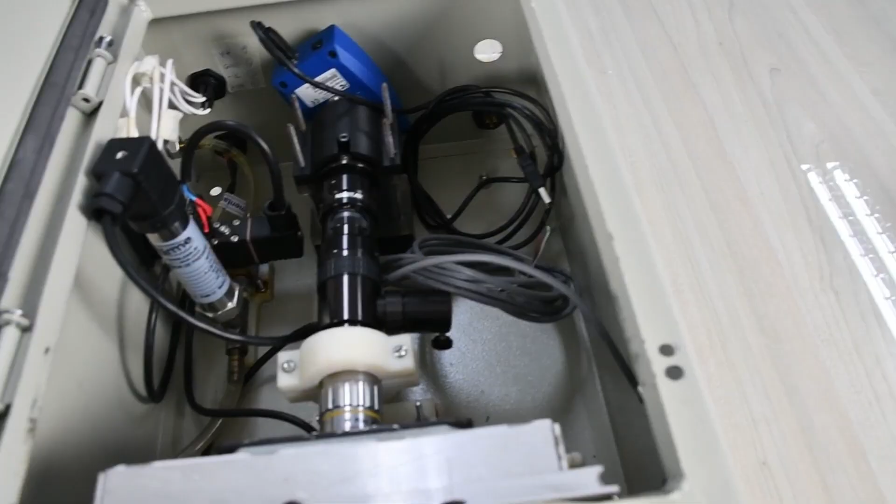Então eu vou mostrar para vocês agora o interior, para vocês terem uma ideia de como é que funciona este dispositivo. Continuidade então ao primeiro dispositivo. Aqui então tem o nosso microscópio industrial. Abrindo aqui, nós temos um sistema de câmera com uma lente microscópica, um microscópio industrial aberto. Então já dá para ver inicialmente aqui o sistema de montagem, de fixação da câmera. Ele foi desenvolvido utilizando a impressora F170, que é um suporte em ABS.

Aqui nós temos um outro suporte já em resina, que foi fabricado anteriormente, porque essa lente fica em balanço. Se eu não tivesse esse suporte, ela ficaria em balanço e eu teria dificuldade de fazer um alinhamento desta lente, porque ela pode também transladar, se mover aqui para frente, para trás.

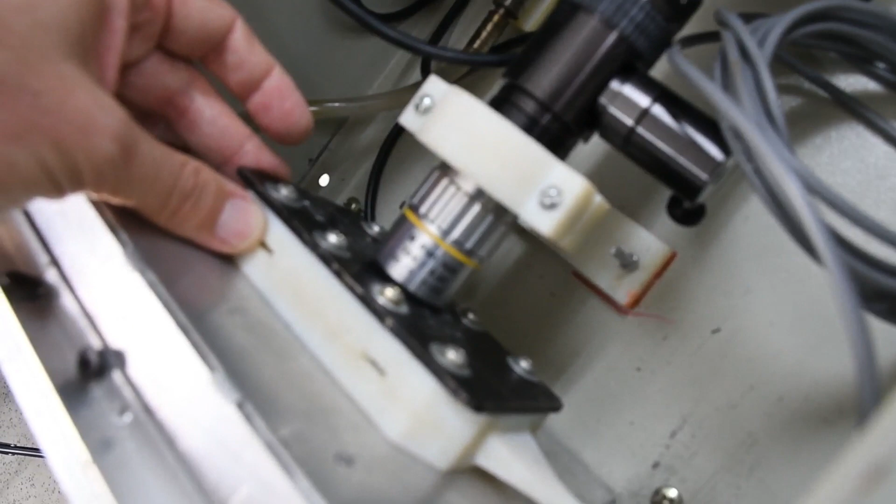E aqui eu tenho o dispositivo que eu tinha apresentado inicialmente, onde as mangueiras entram, a mangueira entra por aqui. Aqui é o ponto de entrada. E aqui, então, eu conecto a mangueira de entrada, que vem lá deste dispositivo aqui. Conecto aqui, o fluido adentra aqui.

Aqui atrás dessa peça tem um sistema de iluminação por meio de LEDs, que eu controlo tensão, potência, da luz emitida. Então a luz é transmitida e ela chega até essa lente, que é a lente objetiva, e vai ser conduzida então até a nossa câmera.

E aqui é a saída do nosso visualizador, que vai então para um sistema de medição de pressão e para um conjunto de válvula, como se fosse uma válvula agulha automatizada. Então via computador eu consigo, por exemplo, abrir e fechar, regular a abertura dessa válvula, ela tem controle proporcional de abertura.

Então eu consigo regular qual é o quantitativo, por isso que é importante medir a pressão, para saber a pressão da linha e automaticamente saber o quanto eu tenho que abrir e fechar essa válvula. Então a abertura e o fechamento fica após o sistema de visualização, e isso não danifica a amostra que eu estou coletando. Com isso eu consigo fazer a caracterização.

Essas imagens então são levadas para um computador e isso é processado. Essas fotos são processadas em tempo real por um código próprio que nós desenvolvemos aqui no laboratório.

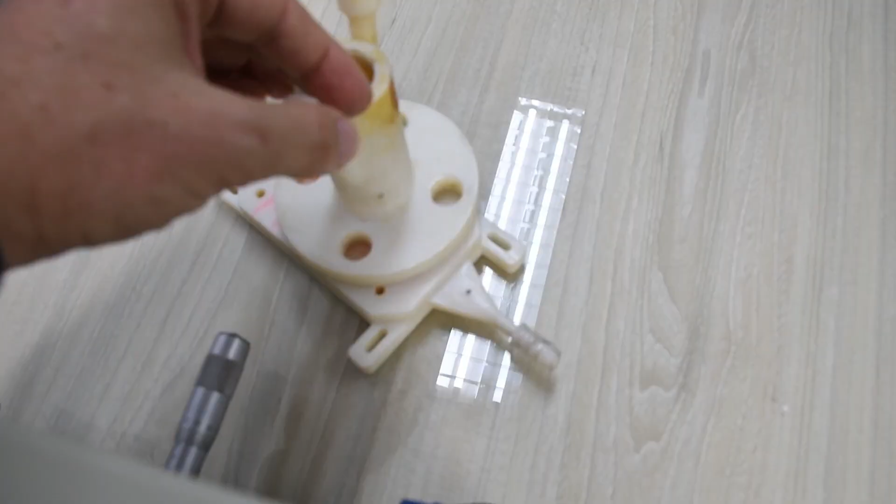Para vocês terem uma ideia, nós temos aqui alguns suportes. Tem um suporte lá embaixo também, este outro, terceiro, e o visualizador é o quarto, além do dispositivo de extração de amostra, que fica na tubulação. Pode ser uma tubulação industrial. Aí a questão de trabalhar com pressões mais elevadas, obviamente eu tenho que projetar espessuras mais adequadas, em função da pressão de trabalho do fluido.

Bom, o segundo dispositivo que nós projetamos aqui é este suporte para cupons, para corpos de prova, que nós submetemos a um experimento que temos montado do lado de fora do laboratório, que tem uma escala mais industrial, e que esta célula trabalha em pressões de até 200 bar. Ultimamente, nós temos desenvolvido os nossos ensaios entre 100 e 150 bar de pressão. Não temos conduzido atualmente testes em 200 bar, mas é possível trabalhar com esta pressão nesse experimento.

Então, basicamente, o que consiste este suporte? Esse suporte ele vai dentro de uma peça que tem um formato de um halter e é colocado lá dentro para uma investigação de um problema de incrustação inorgânica que é muito comum em poços de petróleo. Então, aqui dentro nós colocamos cupons e aí eu consigo desmontar este dispositivo.

Deixa eu ver se eu vou conseguir aqui, tempo real, às vezes não dá certo. Vamos ver. Sim, aqui, estou pegando o lugar errado.

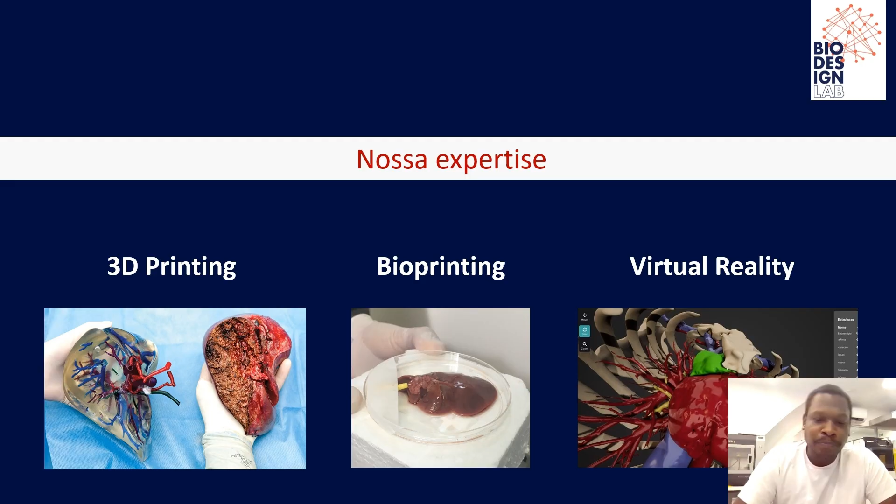Falando um pouco mais agora sobre a parte de impressão 3D. Nossas impressoras aqui do laboratório, nós temos as três, quatro tecnologias principais de impressão, e a gente usa de acordo com a necessidade da pesquisa, do que a gente estiver desenvolvendo.

A gente tem as de filamento, e dentro das de filamento a gente tem uma mais entusiasta, que a gente pode modificar, editar, que é a Ender. A gente já tem uma doméstica, meio prontinha, fechada, que é a Ultimaker. Depois a gente tem uma comercial, maior, com área de impressão maior, fechada, com controle de temperatura, que é a Raise3D, e aí usamos para peças maiores. As de filamento a gente usa para peças maiores ou impressões mais simples.

E a gente tem essa Funmat também, para trabalhar com materiais mais industriais, um filamento com nanocarbono, ou o próprio material PEEK, que está sendo usado para fazer prótese lá fora. Então a gente também já está meio que preparado para isso.

Depois a gente tem as impressoras de categoria de resina, tem de DLP com tela, que é a Anycubic. E a gente tem uma Formlabs também, para trabalhar com materiais biocompatíveis. As de resina a gente principalmente usa para coisas de maior precisão, peças muito pequenas e detalhadas, estruturas muito pequenas.

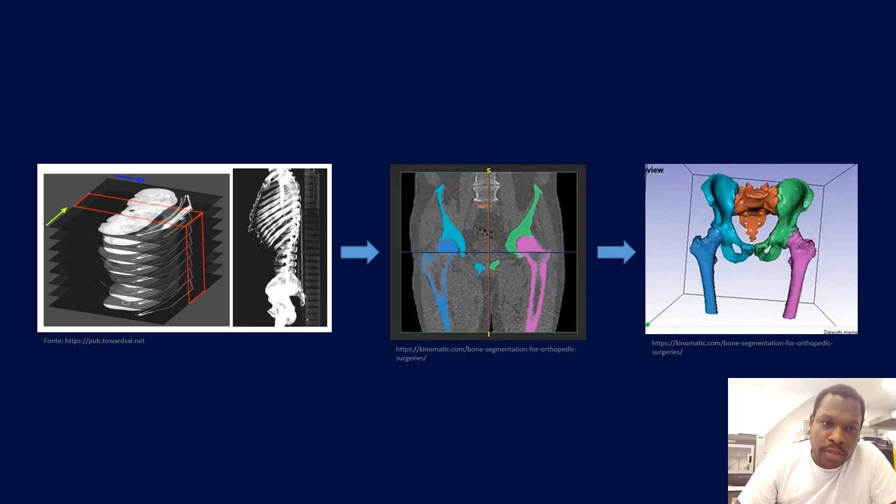Bom, uma vez que você tenha segmentado toda a estrutura em todas as imagens, o programa vai separar, vai pegar só o que você pintou de azul e vai somar. Então vai dar um osso e depois ele vai fazer isso para as outras estruturas, para as outras cores. Assim você vai ter um modelo 3D da estrutura que você quer. Como vocês estão vendo aqui na terceira imagem, cada estrutura com a sua cor definida. Basicamente, esse é o processo para você gerar o 3D na área médica.

Em outras áreas, você pode usar um scanner 3D e digitalizar, você pode ter modelado essa peça, criado essa peça a partir de medidas, por meio de um software de CAD. Nas outras áreas você pode trabalhar dessa forma.

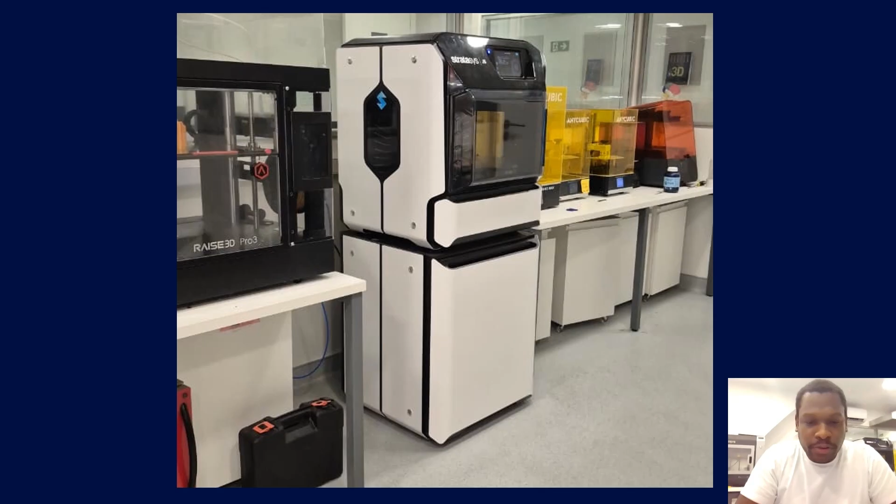Bom, então demos esse overview aqui. Vamos falar um pouco mais sobre a nossa J5. Essa nossa impressora está aqui atrás, mostrando de novo.

Ela tem, a gente usa ela na seguinte configuração: como a gente gosta de trabalhar com várias aplicações, vários experimentos, a gente usa um conjunto de materiais muito variados. A gente buscou usar o máximo, digamos assim, de tipo de materiais.

Então, ao invés da gente usar muitas cores, a gente só tem 3 cores nela. A gente usa o ciano, o magenta para diferenciar bem azul de vermelho, duas estruturas. O branco, porque é o básico. Depois vem o flexível, que é importante para a gente fazer estruturas que possam, como vocês viram agora no vaso. O clear, que é o transparente, é muito interessante, é o que a gente mais usa também, é o clear.

E, por fim, o suporte, que esse suporte solúvel permite fazer estruturas complexas, igual a SLS faz, de pó. Com suporte solúvel, fica tão fácil quanto. É por isso que com esse conjunto de 5 variações de materiais a gente consegue mesclar muitas possibilidades. A gente pensa em trabalhar fazendo parte de articulação, usando material flexível na parte da cartilagem, tentando simular um tendão, fazendo modelos móveis. Tem uma parte de protótipo de órteses, com uma parte flexível e outra rígida. É para onde a gente está pensando em pesquisar também.

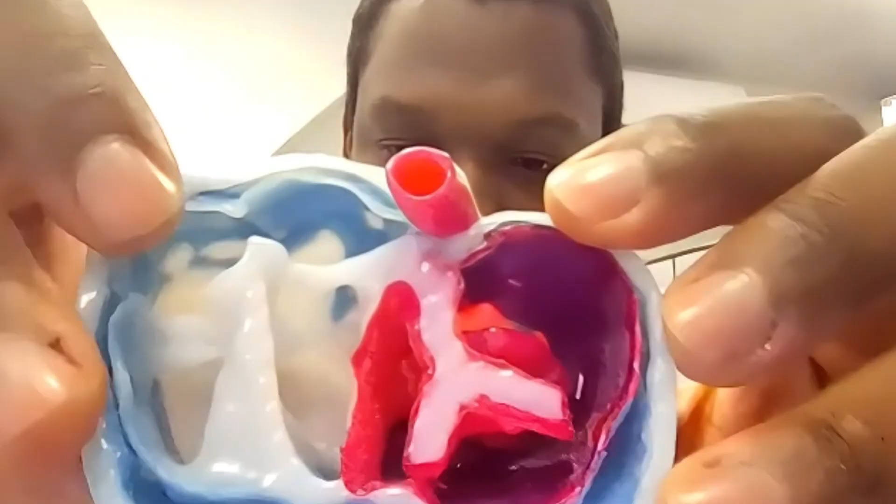Esse também foi capa daquela revista, daquele jornal que eu mostrei agora há pouco. Vou mostrar mais próximo aqui. Tem uma questão também de transparência que a gente usou, o leitoso também transparente, para mostrar melhor essas estruturas.

Esse aqui é um dos casos mais complexos que a gente já trabalhou. É um caso de craniópagos, que são 2 crianças unidas pela cabeça. A gente colocou o cérebro de cada uma de uma cor. Esse é o cérebro da criança de cá, e aqui tem o cérebro dessa outra criança.

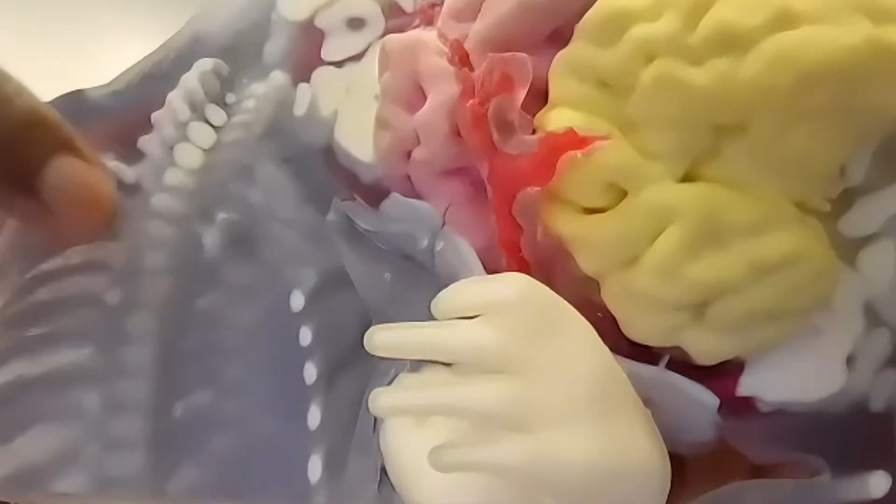Aqui a gente fez uma fusão de imagens, juntou ressonância com tomografia. A tomografia a gente usou para pegar os ossos, tá vendo? É importante para os médicos saberem quais placas da calota do crânio separamos, e da ressonância a gente reconstruiu a parte do cérebro com um nível de detalhes bem alto, e os vasos, a reconstrução dos vasos.

Para fazer essa representação, a gente usou aqui um material flexível, botou cor e botou flexível, então o cérebro mexe, ele aperta. A gente deixou a mãozinha também para mostrar melhor essa questão da flexibilidade do material.

Esse é um dos modelinhos de demonstração da gente aqui, e justamente mostra bem como fica essa parte dos vasos. Isso para eles é muito importante, para identificarem aonde vão cortar, por onde vão acessar para fazer essa parte, para partir esse vaso ou para fechar a passagem do sangue. Então a reconstrução desses modelos é importante para fazer essa discussão interdisciplinar entre as equipes que farão a cirurgia.

Bom, ainda falando aqui por fim, essa daqui é um outro caso que a gente fez, essa boneca faz muito sucesso aqui no laboratório, a gente fez também uma fusão de imagens aqui. Aqui então ficou bom de ver.

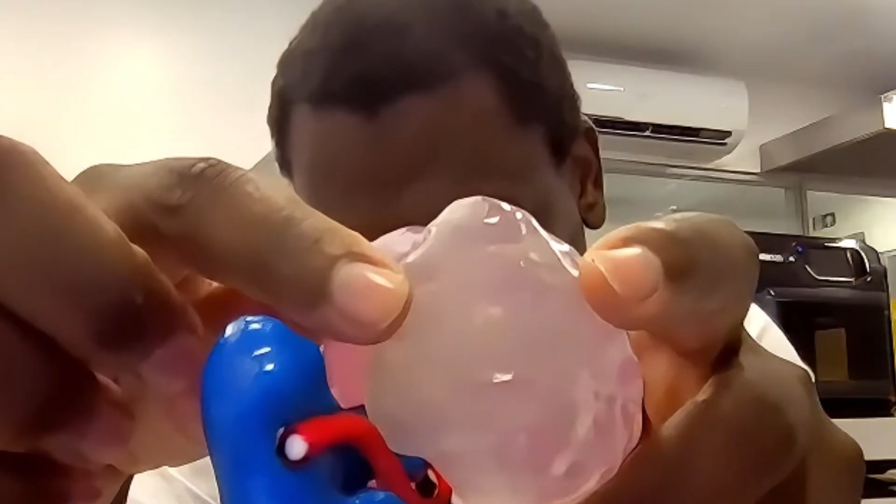Alguns desafios interessantes que a impressora deixa é essa questão do material. Por mais que ele seja transparente, aqui ele fica um pouco fosco, que é onde apoiou o suporte, e essa outra parte fica mais cristalina. Tem uns tratamentos que dá para fazer para resolver, deixar tudo mais transparente, mas é mais para mostrar mesmo como trabalhar isso.

Um outro caso muito emblemático para a gente aqui também. Esse aqui foi um caso que a gente extraiu o máximo de poder da impressora, das possibilidades que ela tinha. É aquilo que eu falei para vocês, a gente edita o arquivo 3D pensando no que o médico quer fazer, no que o médico quer mostrar, e no potencial e nas limitações do que a impressora pode fazer.

Então aqui é um fígado. Deixa eu mostrar mais distante. A gente tem um fígado aqui, tamanho real, e essa parte vermelha é onde tem tumor. E esse médico, que é o Ronaldo, aquele da foto, ele queria mostrar quais lóbulos ele teve que remover para fazer a extração desse tumor.

Lembrando que o fígado tem a capacidade de se regenerar, então você pode remover alguns lóbulos e ele consegue reconstruir esse trecho sozinho. Então a gente pensou em representar aqui os lóbulos, de que maneira a gente conseguiria deixar representados os lóbulos para ele explicar, mostrando também a lesão.

Então a gente fez essas paredes internas com as divisões exatas, e aí então a gente consegue ver que foi um, dois e três. Só que na verdade tem um quarto também, que é essa parte aqui, por causa dessa pontinha que entra nesse lóbulo, essa pontinha vermelha, ele também teve que remover todo esse lóbulo, tá vendo? Esse modelo também foi interessante, entrou na pesquisa dele.

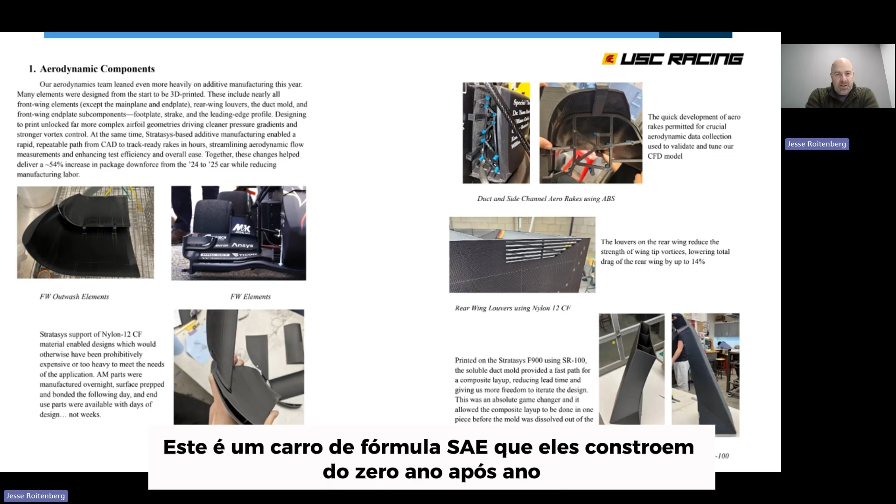First example, this is University of Southern California Racing. This is an SAE formula car that they build from scratch. Year over year, they have slight modifications. They're continuing to use technology to better their performance. The ingenuity is crazy.

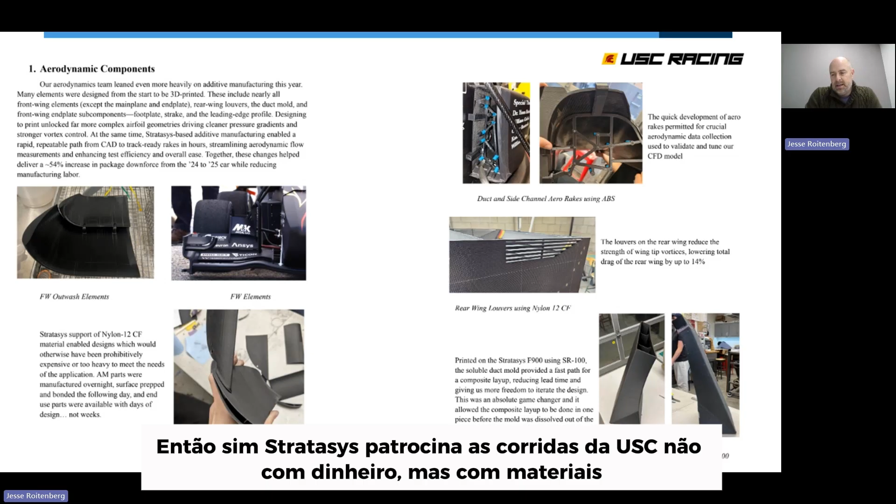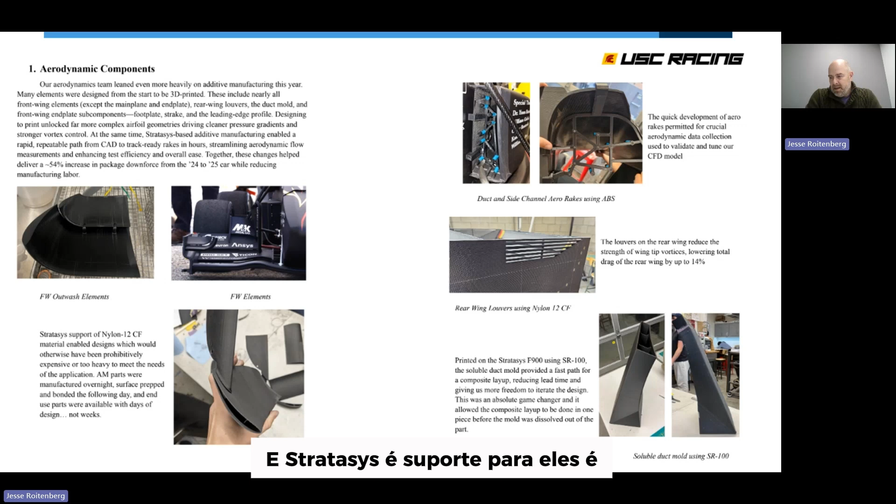So what you see here is kind of a write-up. Yes, Stratasys sponsors USC Racing, not with money, but with materials. They have Stratasys equipment on campus. These students get access to this equipment, and Stratasys's support to them is totally in the form of material donation. High value to them, high value to us because we get stories like this.

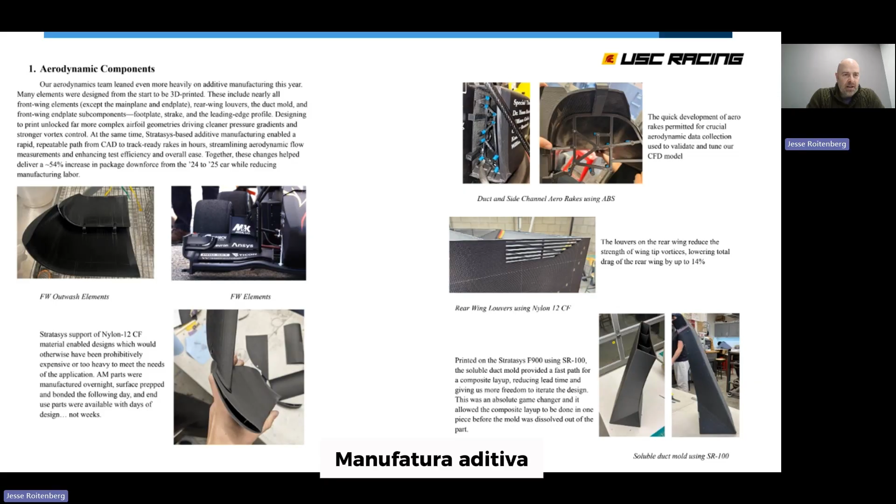I'm not going to read it word for word, but you can see in some of these areas where 3D printing, additive manufacturing has enabled them to rapidly and repeatedly path from CAD to track ready in hours, speeding up time to practice and to test.

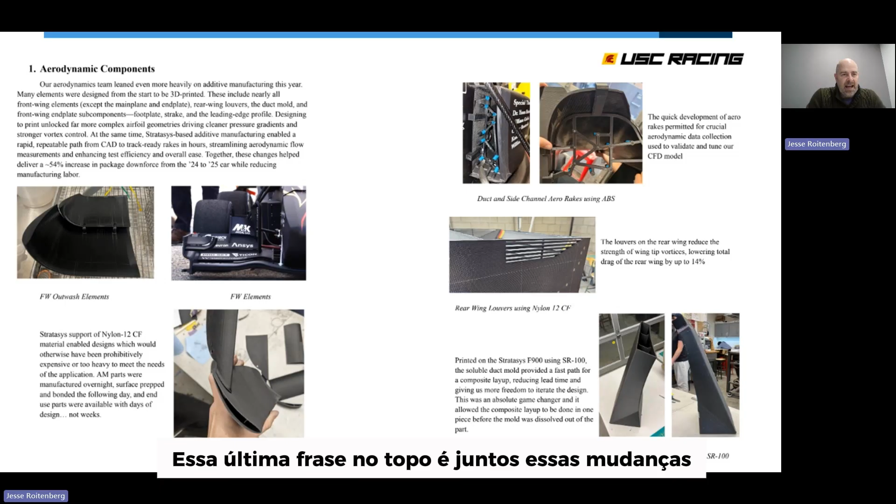One of the statistics they share is that last sentence on top: together these changes help deliver a 54% increase in package downforce compared to the 2024 car to the 2025 car. And that reduces manufacturing labor. But you see they're using nylon CF parts.

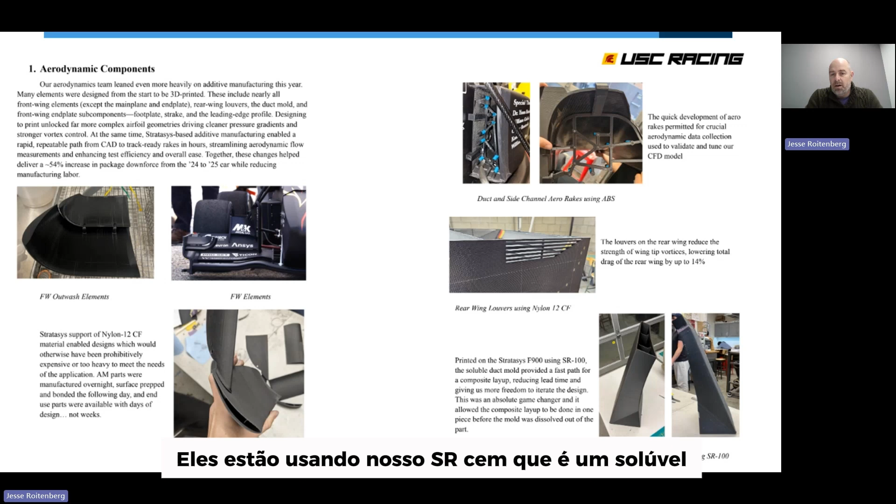They're using our SR100, which is a soluble support where they're wrapping it as a core. They're doing CFD models to tune and validate. All these things are significantly impacting their performance and their output.

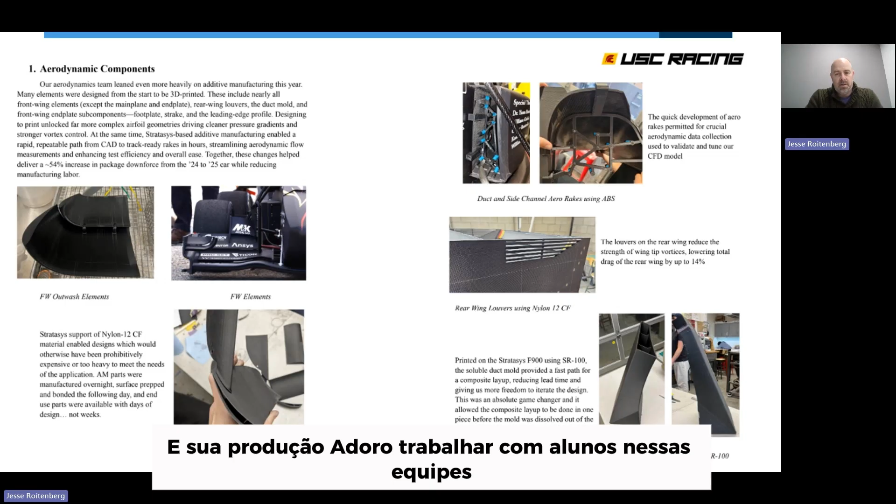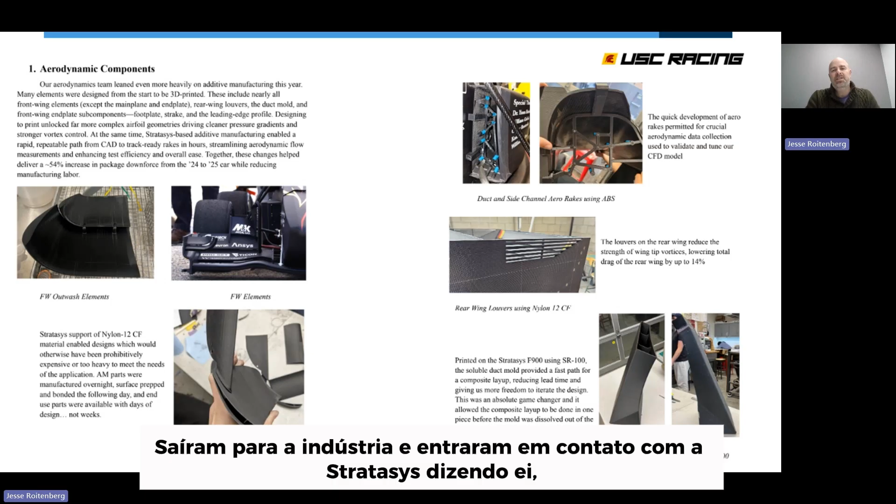I love working with students on these teams because they're the future Stratasys employees, but they're also the future Stratasys customers. We've had students that have left this team, gone out into industry and reached back out to Stratasys saying, hey, I work for this company.

We have a very low-end 3D printer. We need some material like Ultem. Can you put me in contact with somebody? So by these students using this technology, understanding the capabilities of these materials, they're significantly better off as they move forward because they understand the real capabilities of additive manufacturing.

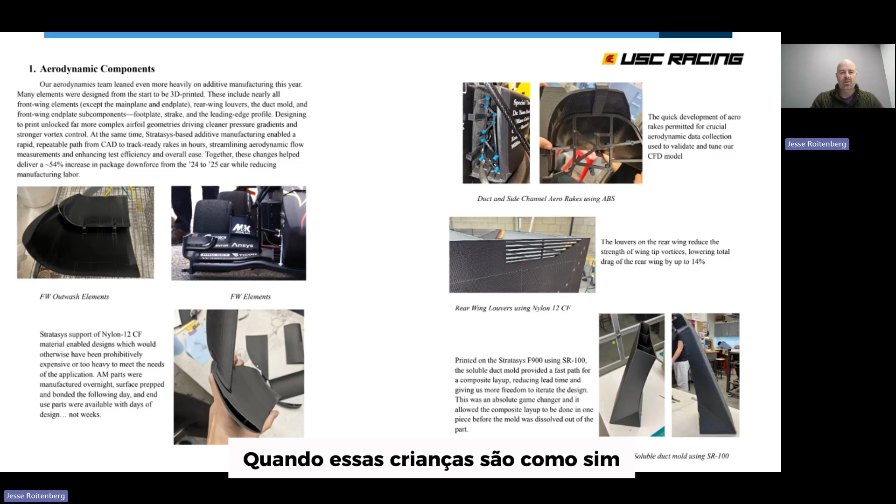That's where I get my joy. That's where I get my excitement. When these kids are like, yeah, that's nice, but I need this material because it has this temperature deflection or it has this chemical resistance.

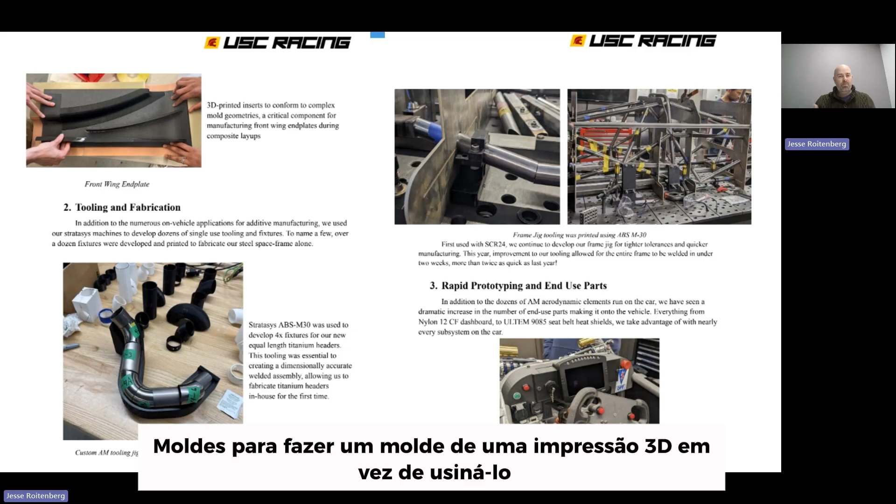Other parts that they've printed, you see the front wing end plate. They're doing molds. To do a mold from a 3D print versus machining it is such a save on materials, but also a save on time, and it's not manual labor. So they get to build those molds.

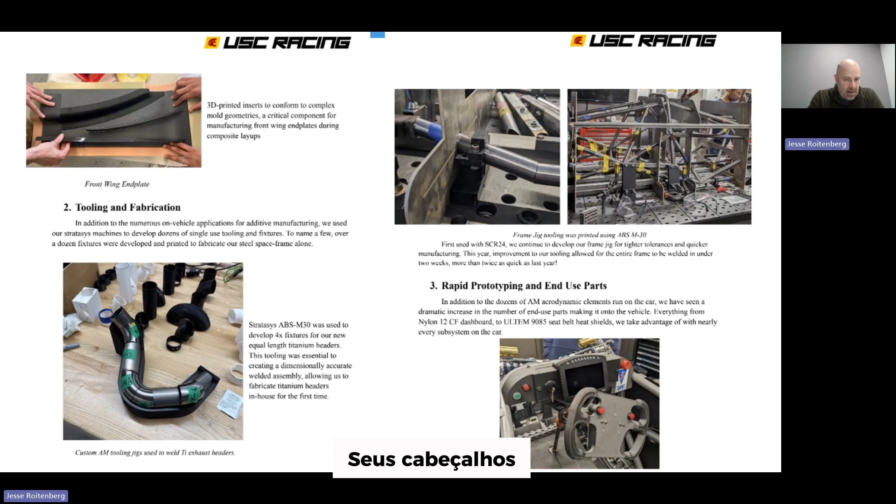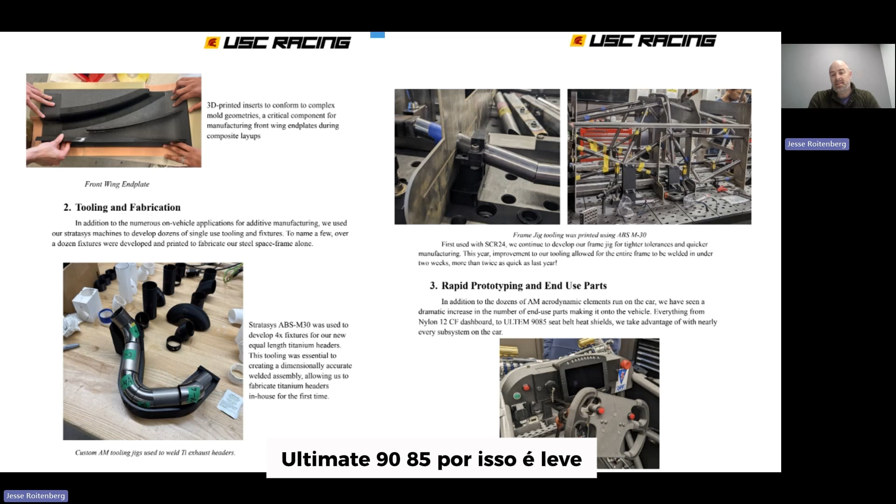You can see the 4 fixtures in the bottom left that they've combined to help with their headers. You see the steering wheel in the bottom right. They're changing that up, building it out of Ultem 9085, so it's lightweight. They can customize, embed parts in it, drill it, tap it. This car uses so many different materials from our system.

And then you can see the jig frame up on the top right, built out of ABS M30. This team is truly using this to the fullest extent.

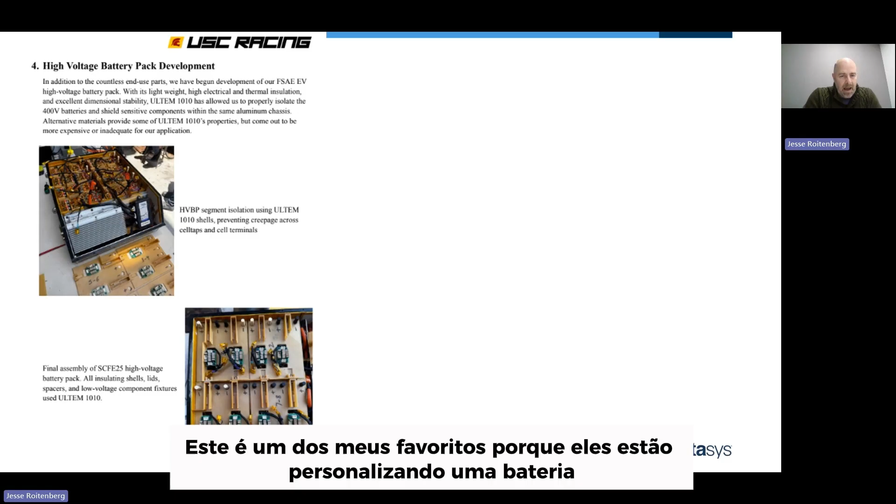This is one of my favorites because they're customizing a battery pack. When they can customize it, they can stack all the batteries how they want, angle it, get the airflow right so they can stay cool.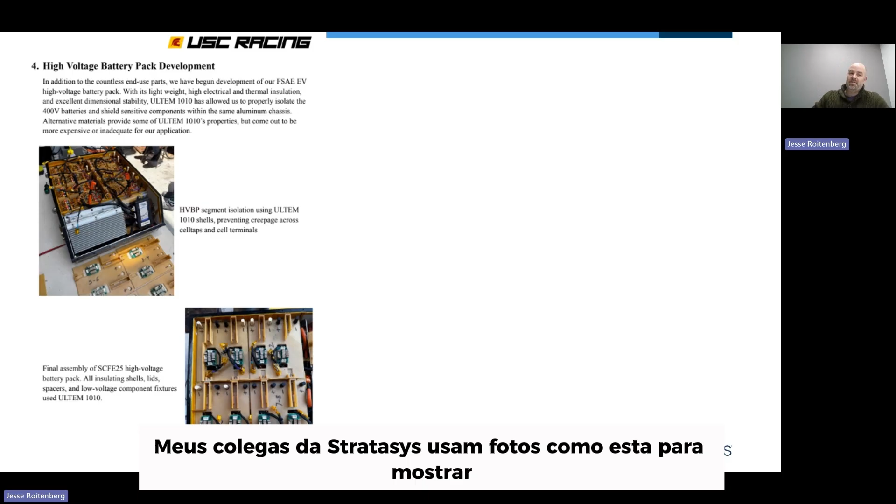This is awesome to see. I've seen some of my counterparts at Stratasys use pictures like this to showcase to the military, to showcase to aerospace, because they love the creativity of it. And it's just a great example of how they're doing it.

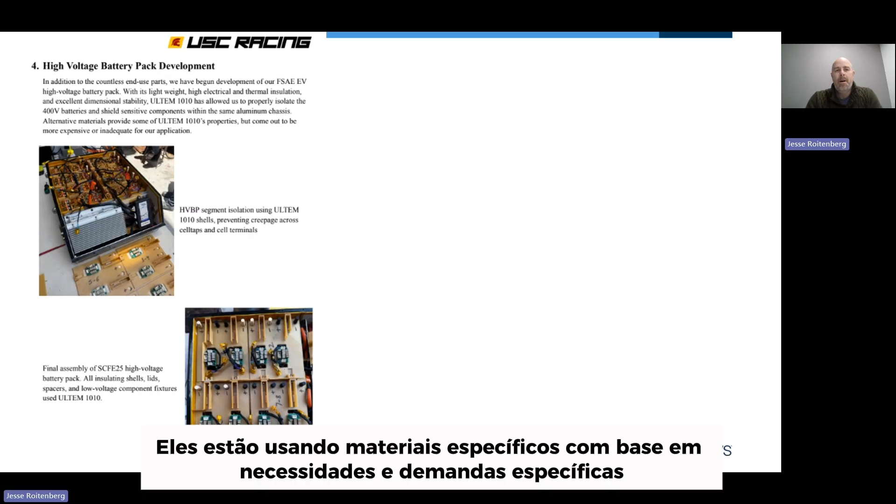In these parts, they're using our Ultem 1010 versus our Ultem 9085 because of the capabilities. So they're using specific materials based on specific needs and demands. That's the talent. That is what we want learned when we're sponsoring these groups.

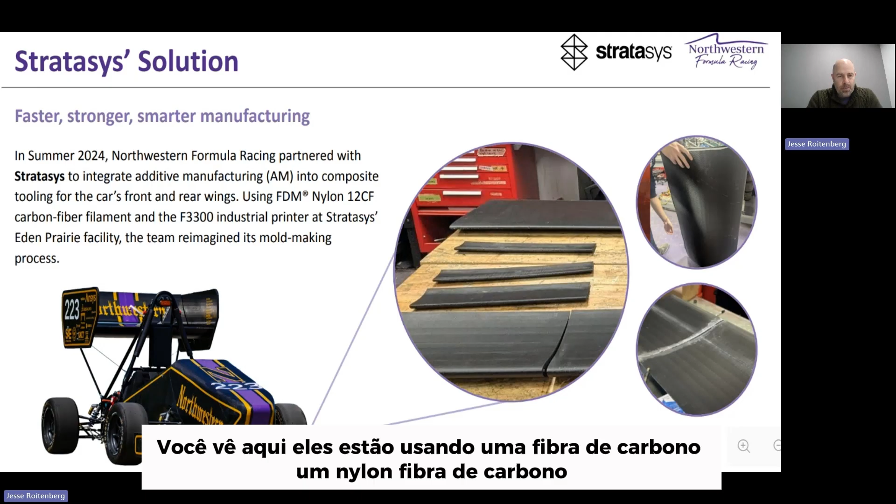So here's a different example. This is Northwestern, a university in Chicago. We partnered with them in that same boat where we did a little printing parts, but we've also donated some materials. You see here, they're using carbon fiber nylon, used off of our F3300, to help with their mold making. So they're doing mold again, and then you can see where on the car that is fitting.

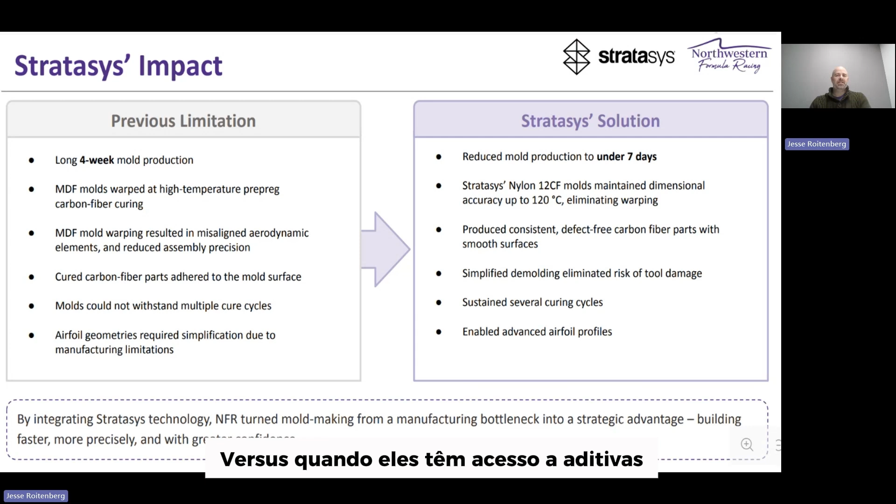I love this page that they put together to show how it was versus when they have access to additive. Lead time from 4 weeks to 7 days. That's a pretty strong case to make when you can do something in 7 days versus 28.

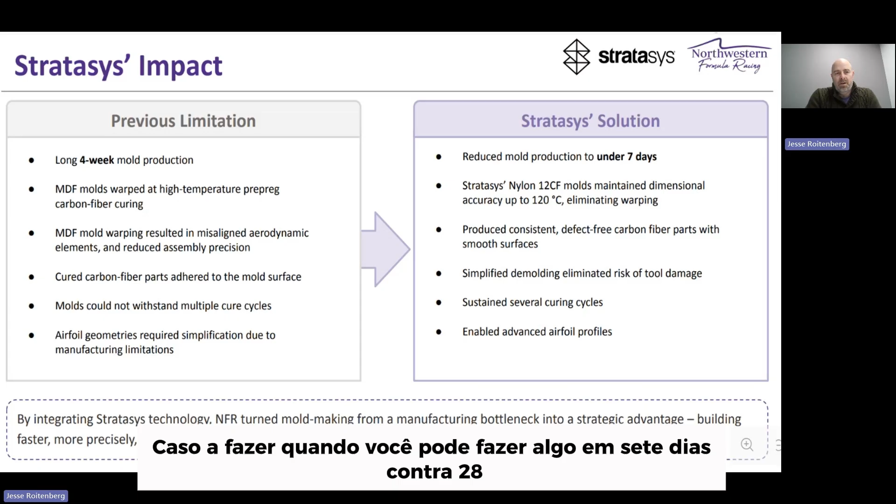Their molds warped in the past. The CF maintained dimensional accuracy. The cured carbon fiber parts adhered to the mold surface in their previous attempt. Now they've simplified the demolding and eliminated that risk, so they're not damaging the tool. The molds couldn't withstand multiple cure cycles. Now they can, because of the advanced materials that they're using.

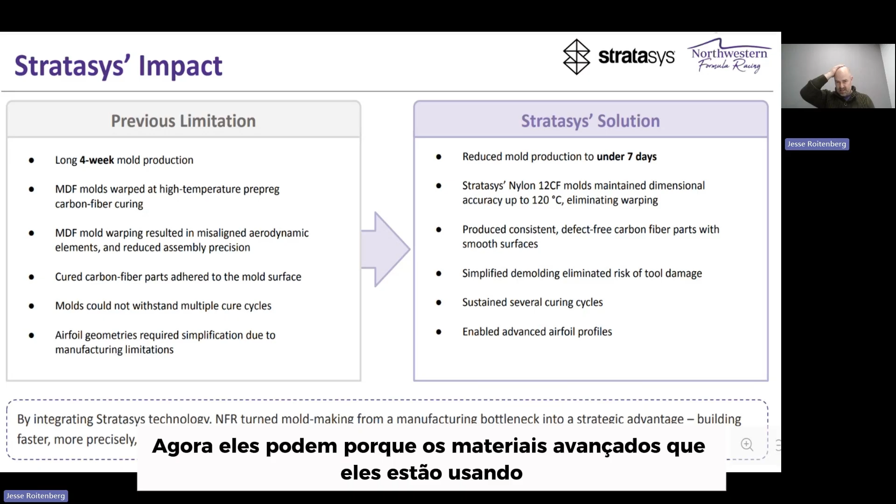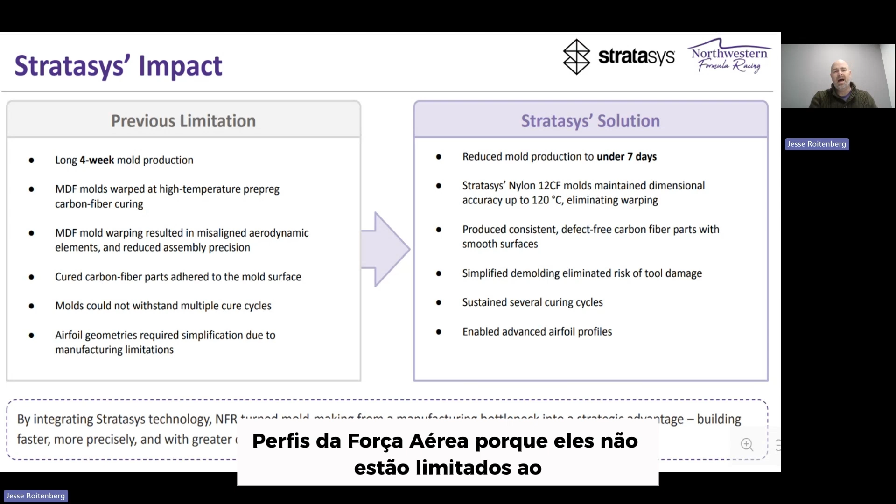And then, using Stratasys, that enabled the advanced airfoil profiles because they're not limited in how they're manufacturing these. And then I love at the bottom where they talk about how, by integrating Stratasys technology, the Northwestern Formula Racing team turned mold making from a manufacturing bottleneck into a strategic advantage, building faster, more precisely, and with greater confidence. I love that.

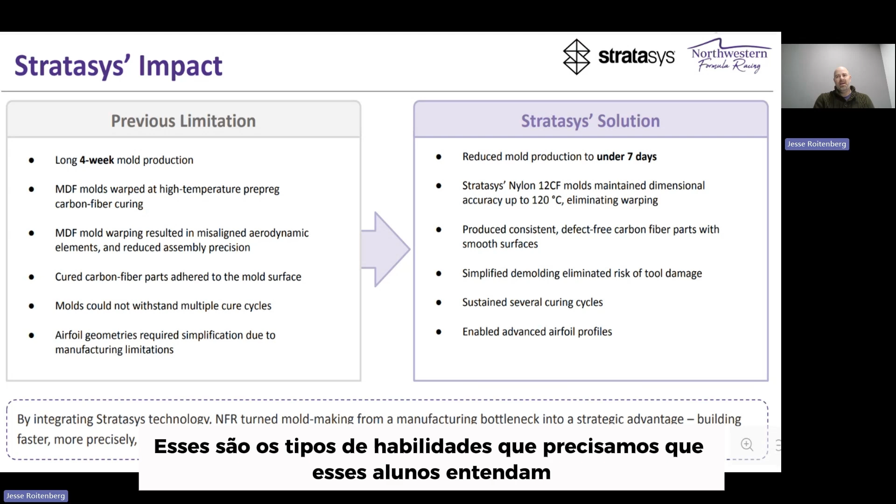And to me, those are the types of skills we need these students to understand. There's a huge benefit in additive, and there's a huge benefit in subtractive. These students need to know when to use which, because in reality, they're going to have both tools as they get into their careers. That's exciting to us.

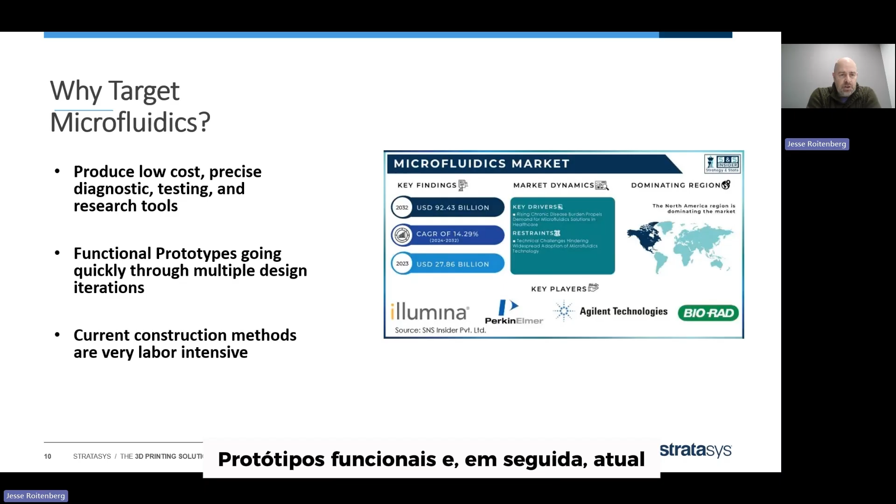Who uses microfluidics? I've seen it out there where chemistry groups, research groups, where they're doing blood or genetics. We've seen aerospace, because they're doing a mixture of fluids and seeing how it cools. Automotive in the same way. But you could see, to produce low-cost diagnostic testing, functional prototypes, and current methods are very difficult to do microfluidics.

I believe there's another 3D printer out there that could do microfluidics, but that's all it does. Our technology can do microfluidics, and then that same build plate can print a medical model or could print an engineering model.

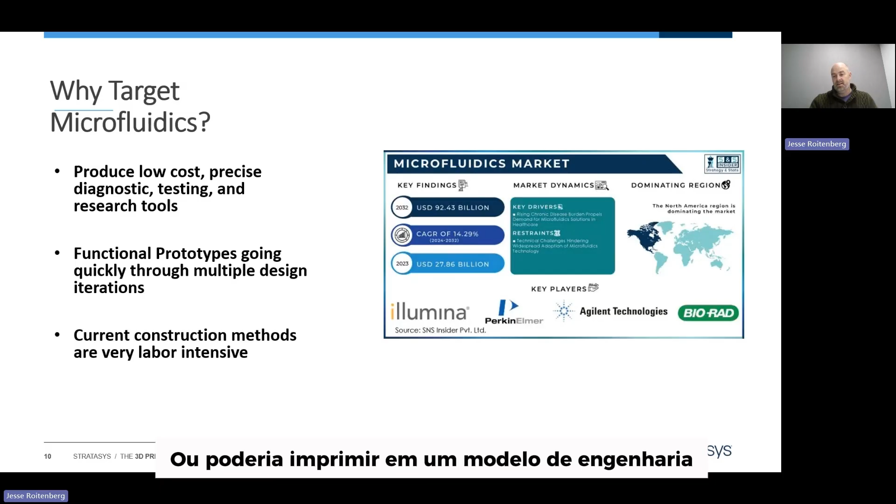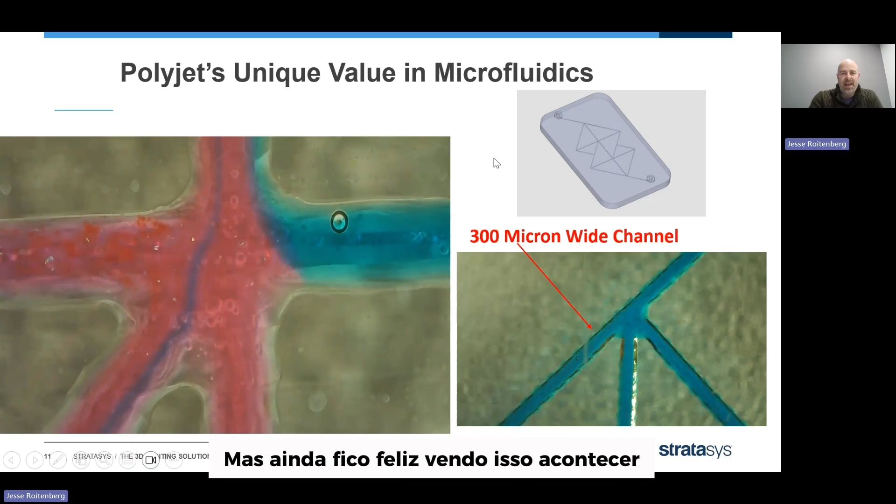So this is a huge thing, because in research areas, this is what people are checking: how are these two fluids going to be impacting each other? Oh, there we go. Now there's a ton of red being pushed through, and you see how they're mixing. You know, I'm not a research scientist, but I still get joy watching that happen. And that's all through a printed model.

So the way we're doing it is we're using our input of print air. We're pausing the printer, we're squeegeeing in a glycerol IPA solution, and then we are squeegeeing it off the top, and then we're going to click print again, and then we print over the top. So there is a manual process that goes through it.

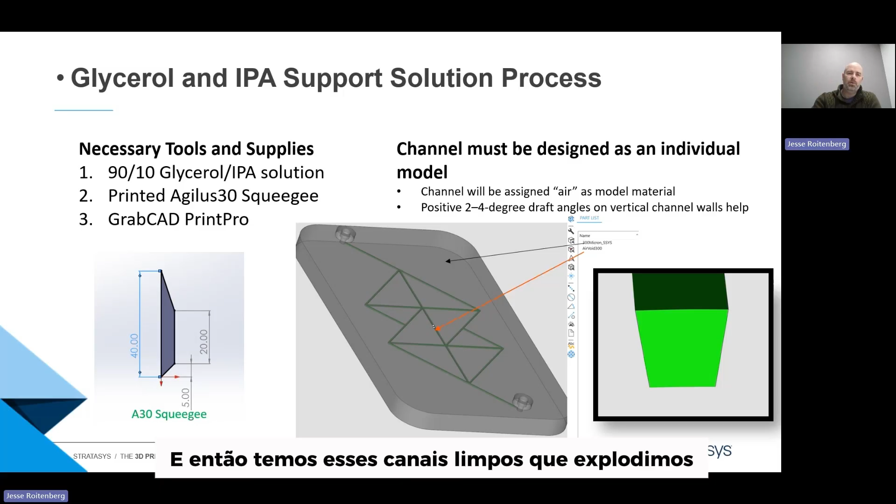You can tell the printer to stop at a specific level, where then you're going to squeegee in the solution. You have to squeegee in the solution, or else you're not going to have an open channel. What you'll have is it'll seep in and it'll build, so we have to build on top of something. And we figured out this mix of glycerol and IPA. We can print over the top, and then we have these clean channels that we blow out that solution at the end, and then have what we consider a microfluidic.

We show here the process used in our software to print air. We're assigning these channels as air, so the system will not print any materials in that area. It'll print on the other side where it's printing our Vero. So we're inserting a pause before the layer goes over the top, and when we do that pause, that's when we go in and put in the solution.

The nice thing about GrabCAD Print Pro is it has a step-by-step tutorial for anything you want to do, whether you're printing air or doing a smart insert. Every step we've really drawn out. If you still have questions, that's why my team exists, the Stratasys education team.

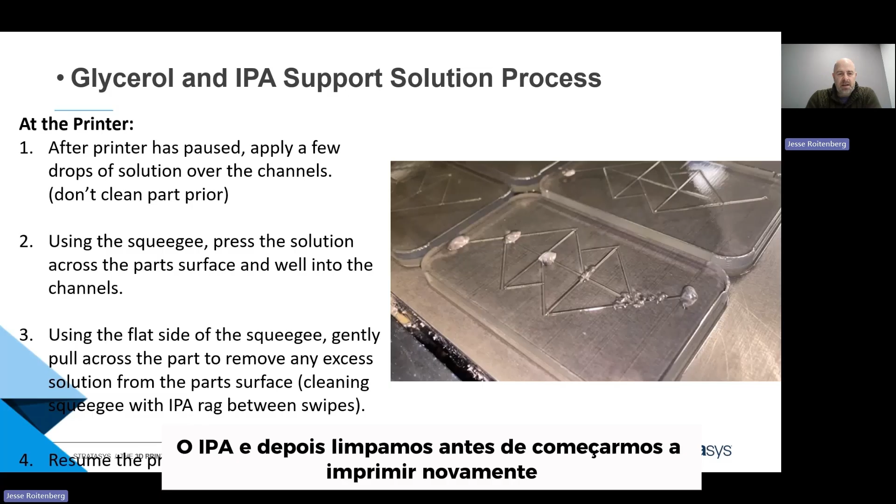After the pause, we apply a few drops of the solution over the channels. We use this 3D printed squeegee to push the solution into the right spots, and then we use the other side of the squeegee to gently clean everything off with IPA, pull off the IPA, and then wipe it before we start to print again.

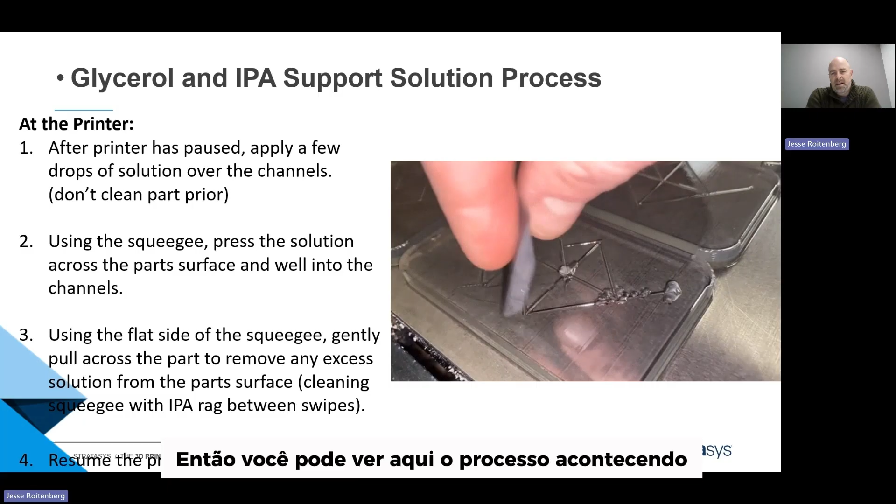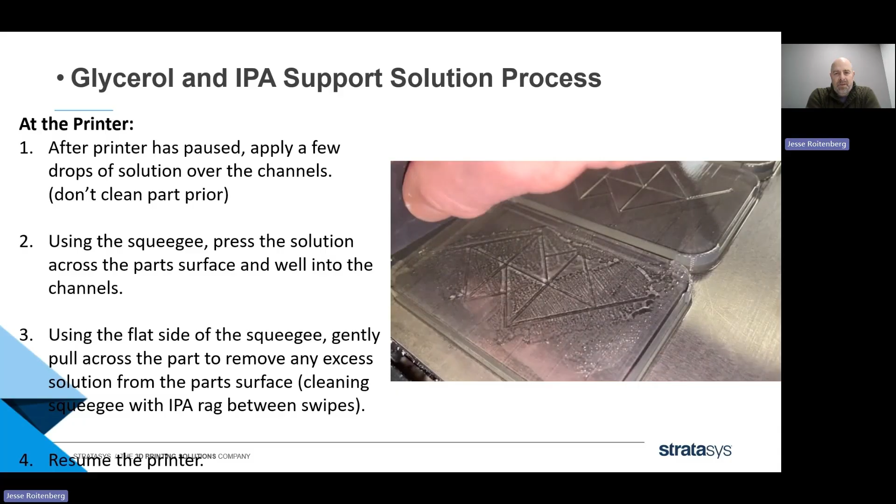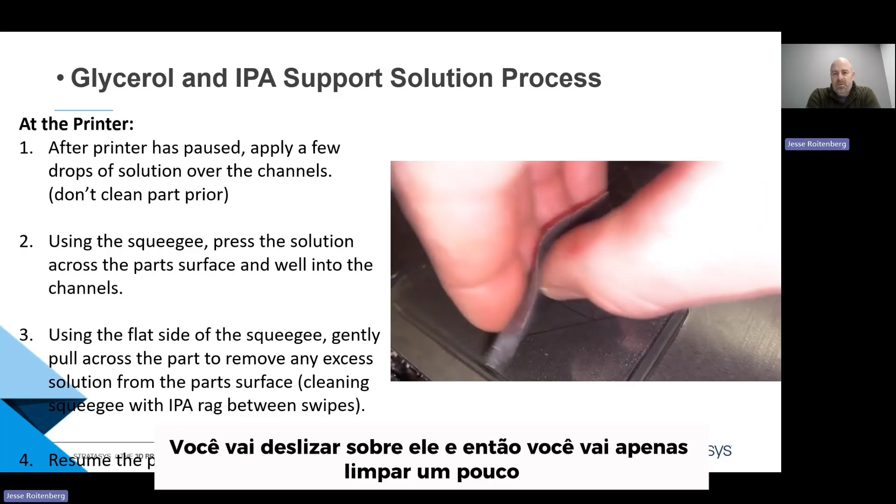So you can see here the process going on. This is the squeegeeing, making sure that solution is getting into those channels. What our application engineer is using there is an actual 3D printed Agilus squeegee. But it's kind of like doing spackle at home - you're filling in that hole, then you slide over it, then give it a little wipe. Pretty simple to do.

So in your labs and with people you're engaging with, you can ask: are they doing microfluidics? Are they wanting to? What are they limited by? Do they do anything custom? And if they're outsourcing, how long is it taking, how expensive is it? Because these parts are not very expensive when you actually have a printer.

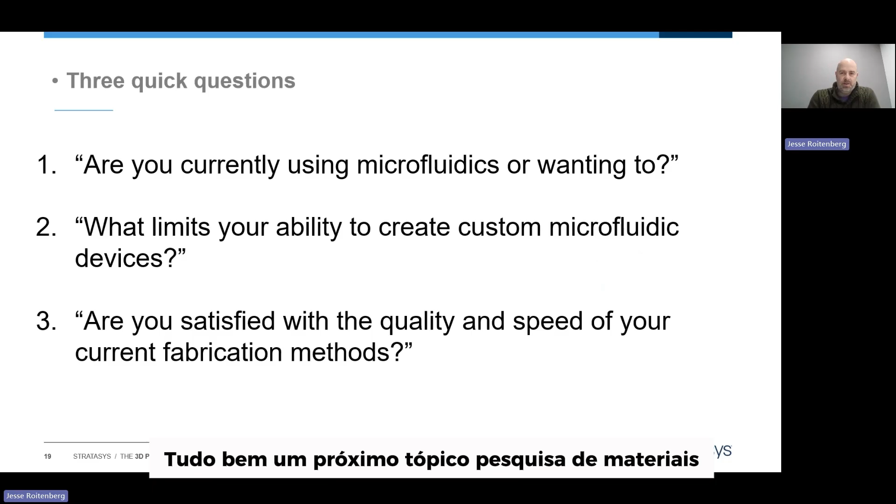All right, next topic, materials research. At St. Louis University, they recently bought one of our Origin One printers, and they are doing a lot of different printing on this technology. The beauty of the Origin...

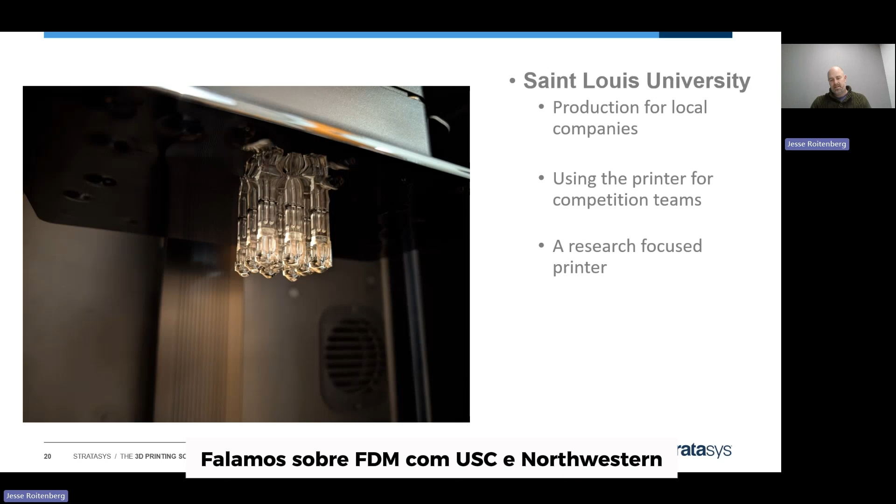So we've talked about FDM with USC and Northwestern, we've talked about PolyJet with microfluidics. Now we're talking Origin. With Origin, this is our true open material system. This open material system has capabilities of hundreds of resins, as long as these resins can be cured with the wavelength that we can hit with that system. We have the ability to heat, and we have the ability to put air into this, so it enhances the amount of resins we can do, enhances the material capabilities of these.

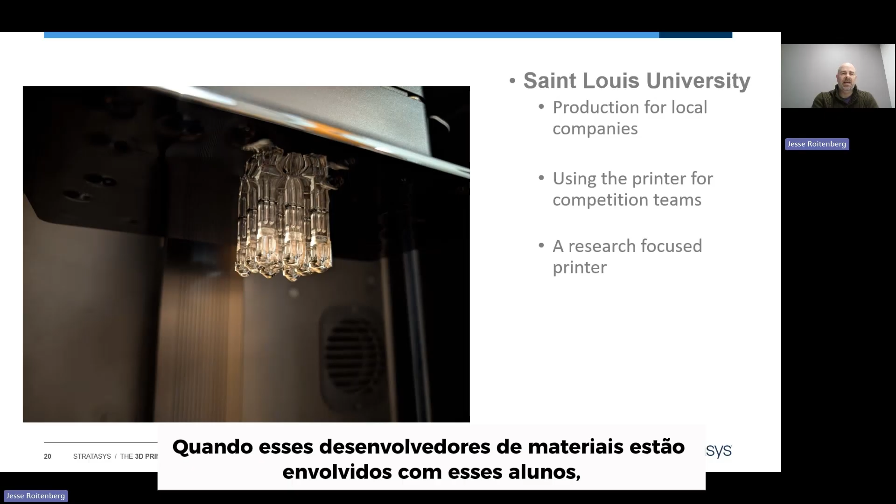At St. Louis University, they're doing production for local companies that have a specific material they need and specific parts. They're using this technology within their competition teams, and they're also doing research on next generation materials. They have partnerships with local companies that have requested they develop and prove out that they can print certain materials. That is so exciting for a student in this lab who has access to industry, but also doing some really unique pieces. It's fun to see when these material developers are engaged with these students, because the creativity is very, very impactful.

All right, healthcare and education. We see a massive growth in labs focusing on education and simulation in terms of medical modeling.

I always compare it to: if you want to be good at something, you're going to practice. Surgeons can only practice - it's rare if they ever get to, because usually as a surgeon you're not going into the cadaver lab. Any specific ailment you really want to see, that cadaver may not have it versus the person you're going to be operating on. There's a lot of variables.

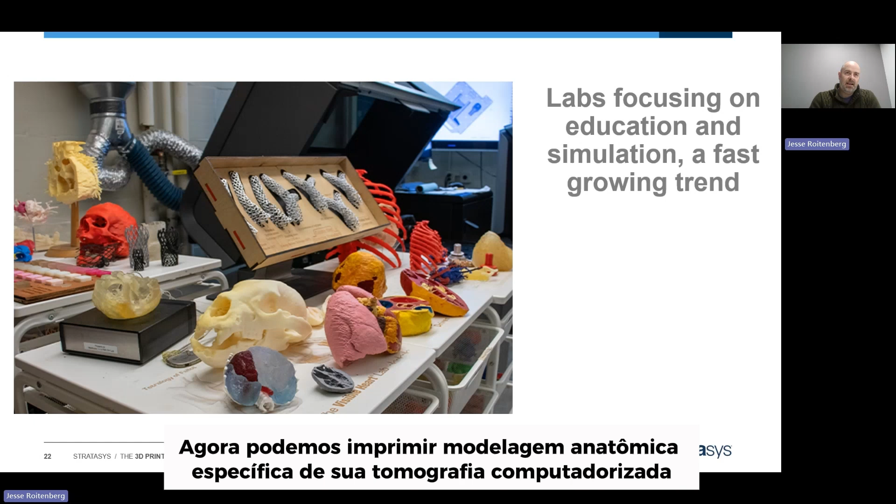Now we can print specific anatomical modeling from your CT scan or MRI, so a doctor can have a model. They can hold your heart, hold your liver, and see a mass or a tumor in it. So they get to actually engage with what they're going to see when they do the operation. This is a massive impact - they call that surgical planning tools. We've heard stories of doctors carrying around these parts in their gym bag, thinking about how they would do this.

How would this work? How would I operate it? I've heard so many times a 3D model turns something from inoperable to operable, because they're thinking about it differently, because they're seeing it in 3 dimensions - oh, the tumor's here, I could go in through there. It just opens the eyes.

It's a massive impact on medical education and medicine in general. This example here is at the University of Minnesota - this is their visible heart lab. This lab is 1,000% about research. All they're doing is printing parts, sharing them with future surgeons and doctors. They work with the university hospital, and any unique cases, they're helping print things.

This is a place where many people donate their hearts for science. So being an organ donor, this is one of the places they go. What they would do with the hearts is scan every heart and catalog it. So they have a library of hearts with a bunch of different ailments - pacemakers, old pacemakers, new pacemakers, hearts with multiple pacemakers. This is a big lab where a lot of surgeons go, and they have a big partnership with Medtronic, a local company here.

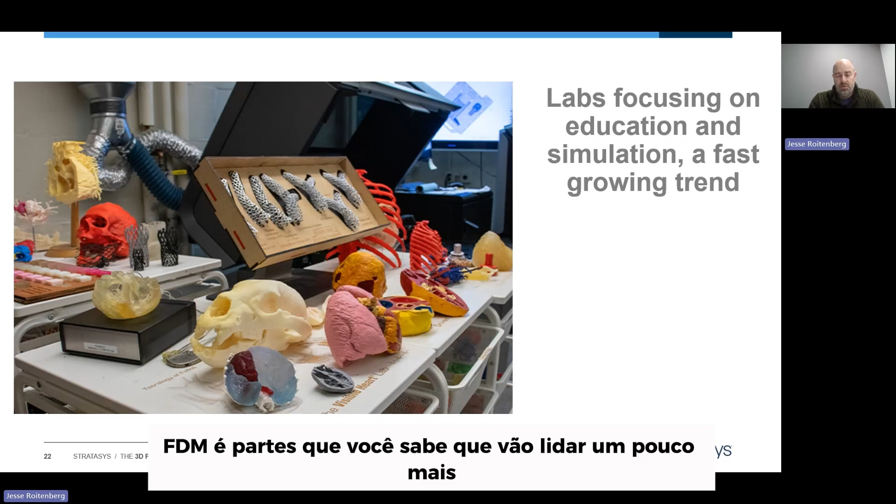But a ton of medical modeling happens in this lab. They have both PolyJet and FDM. FDM is parts that they're going to handle a little more - a lot of times they're giving those away to tours. The PolyJet, they do a lot more surgical modeling, and some really lifelike stuff. So they get doctors in there all the time looking for, hey, how do we place this stent? What do we do here?

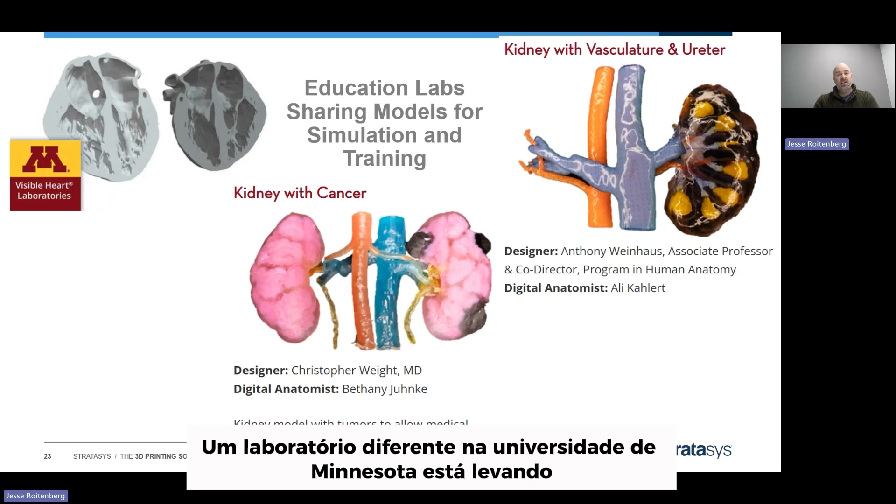A different lab at the University of Minnesota is taking it to another level, where they're basically doing this medical modeling but then offering it as a service. So they'll print and sell these models to educators out there that need that specific model and how it looks. Some of these kidneys here are the most intense 3D printed kidneys I have engaged with, and we're seeing a lot of people have significant interest in this.

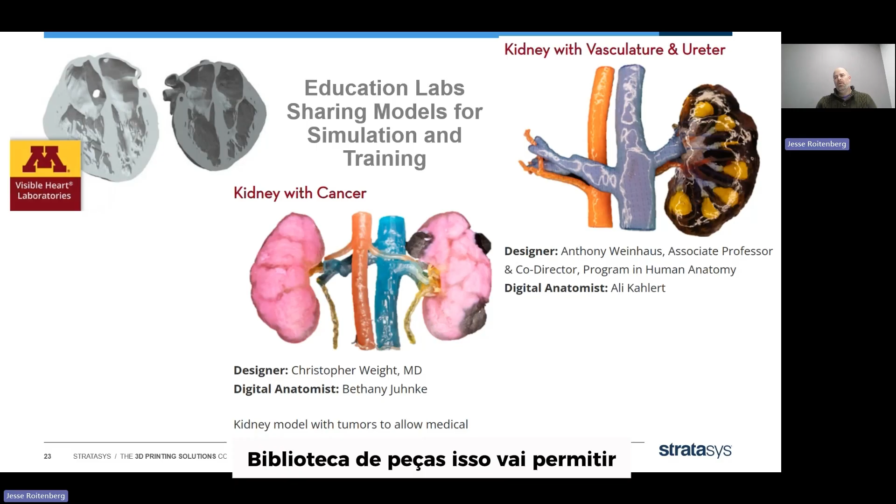It's to the point where they have an artist on staff helping with these models. They work with all the doctors on campus, building out this library of parts. This is going to allow groups that may not have the skills to do the segmentation - converting a DICOM file, which you'd get from an MR or CT scan, into something that is printable. That's called segmentation, and in segmentation you need to be a bit of an artist and somebody who understands anatomy.

They are breaking down that barrier, saying, we will do all the work - here's the file, or here's the part, you just pay the price for it. This lab has had surgeons come in from different institutions say, I would buy one of those, I need 10 of those.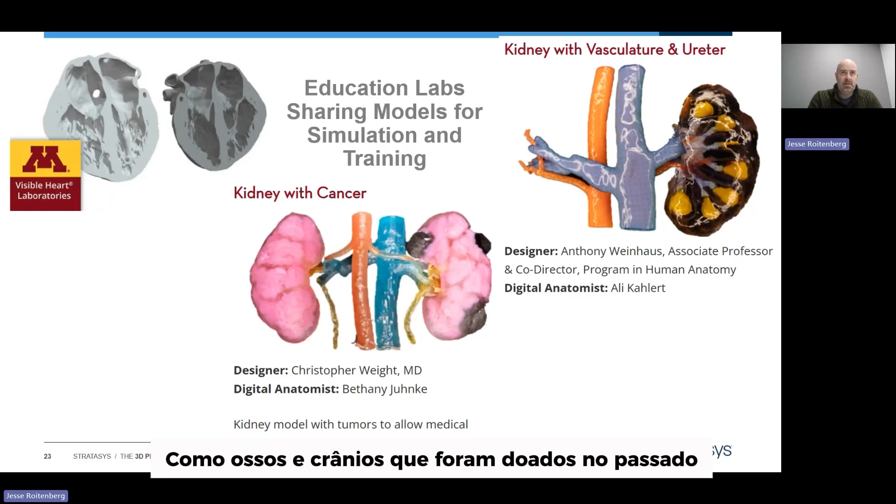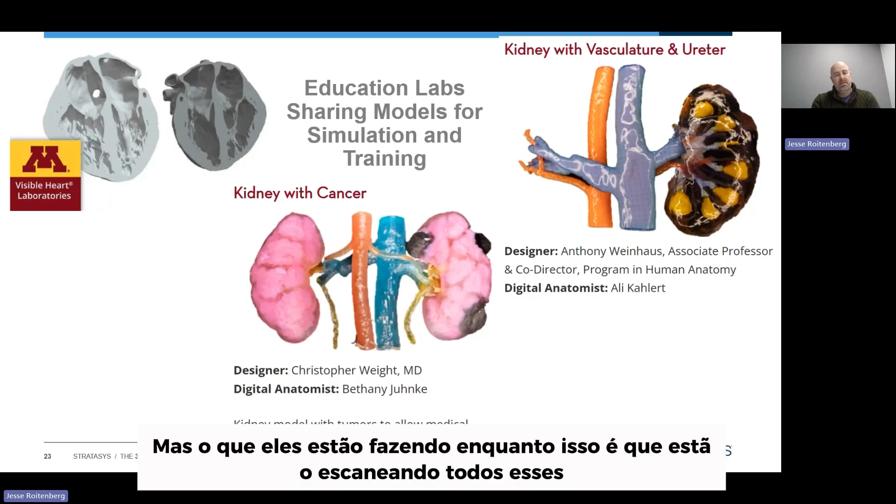This institution is also going through a transformation, where a lot of their anatomical models, like bones and skulls that were donated in the past, they don't have proper consent to keep. So they have to appropriately destroy those. But in the meantime, they're scanning all these and making 3D prints of them, so there's not an issue of concern from the liability or ethical standards.

So they're calling this a death mask, because it's something the family typically will want to use, like for an open casket. But it's also something to help those doctors during the process, because sometimes they're taking the jaw, eyes, nose - and it's a little disjointing to see that while they're taking other organs.

So our counterparts who go through this get a notification that, hey, within the next 72 hours at any point in time, they're basically on call - they have to go, scan, get to their printer, print, and bring this part back so they can do the surgery. They've had a couple really nice articles around this. If you're interested, look up NYU or New York University face transplant and 3D printing, and you'll see a bunch of stuff they do here.

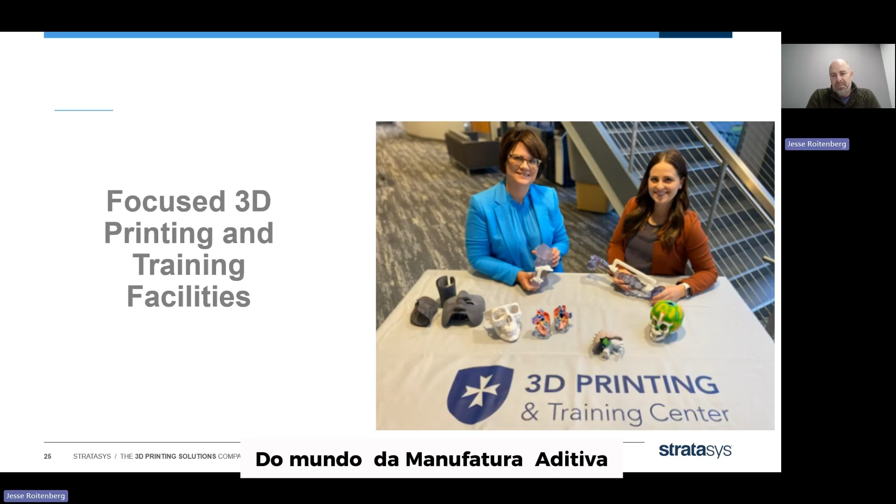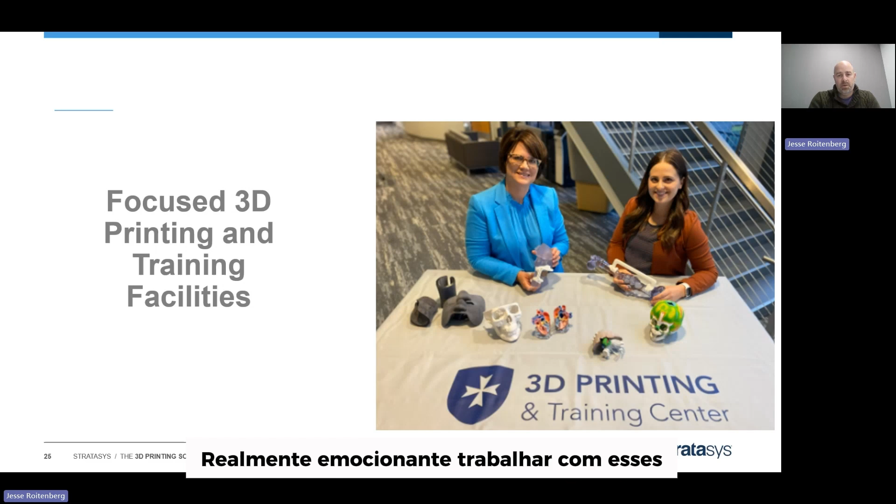We are also seeing focused 3D printing and training at these institutions. They are printing parts and basically enhancing the capabilities of these future doctors and nurses to understand the world of additive. Here you see two of our customers at Clarkson College in Omaha, Nebraska. They print a ton of parts and have built out courses on 3D printing in the medical space. Really exciting to work with these groups. They're showing us a lot of really cool things about how our technology could and should be used in their training, so we partner with them to showcase what they're doing, because they're making the impact so the next generation of doctors and surgeons understands the power of additive.

All right, I'm going to dive into our certification now. Our certification was created because our customers kept asking us, hey, we need content, we need information. Stratasys being a 40-year-old company, we have a lot of information, a lot of experience, and we have trainers who do this training constantly. What the ask was from customers and partners was, can you develop something that you can train to these instructors so they can then be the trainers of it. All right, train the trainers.

So we built some content. What we were trying to solve while we built this content was, there's a lack of workforce-ready skills around additive. I believe that now. I believe we're making an impact, but there's still a long way to go, meaning a lot of people buy our equipment and don't realize the power of it. So we're trying to upskill there.

Industry demands are ever changing. We're starting to see our equipment on the manufacturing floor. Maybe not 100% for additive manufacturing for end-use parts, but for tooling, production support, jigs, fixtures, no-go gauges, all these different areas where people are using it. We're starting to see that on the manufacturing floor. That means the students being hired need to understand the power of this and how to use it.

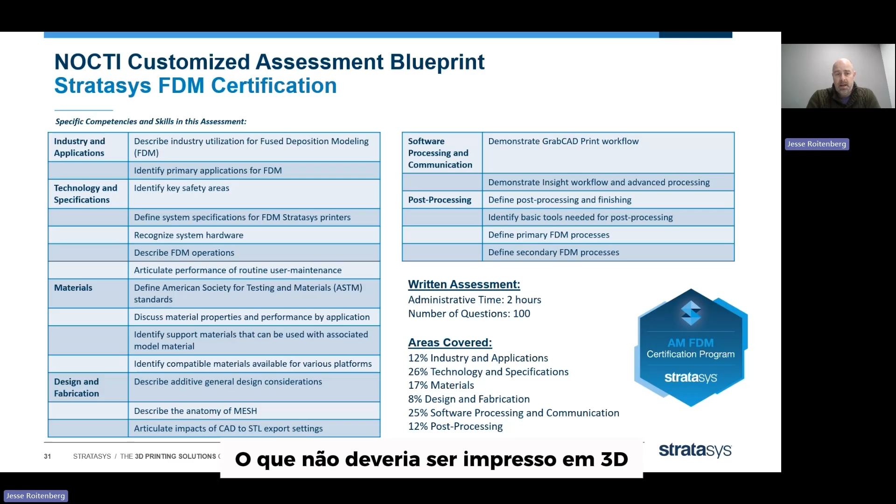Here's a breakdown of how the level 1 FDM certification mix is in the modules of what we offer. I'm not going to read it all, but it dives into materials, technology and specifications, design and fabrication. So thinking about what should be 3D printed, what shouldn't be 3D printed, describing certain parts of CAD. But we also dive into the software and processing and finally the post-processing, meaning not every part off the 3D printer is exactly what you want.

So there are different processes for inserts, for bonding, for painting, for plating, all that type of stuff. So we give a really good overview.

Our expectation after somebody goes through this is they should be able to determine if they're producing something, should it be printed? Should it be machined? They should be able to do, hey, should it be printed in this technology? If this technology, which material? And so there is that deep dive on materials capabilities and stuff like that.

On the bottom right, you're seeing the percentages of areas covered, the written assessment, the test. You get 2 hours to do it. It's 100 questions. But then, like I said, areas covered gives a good breakdown of how much percentage is taken up in the certification around each topic.

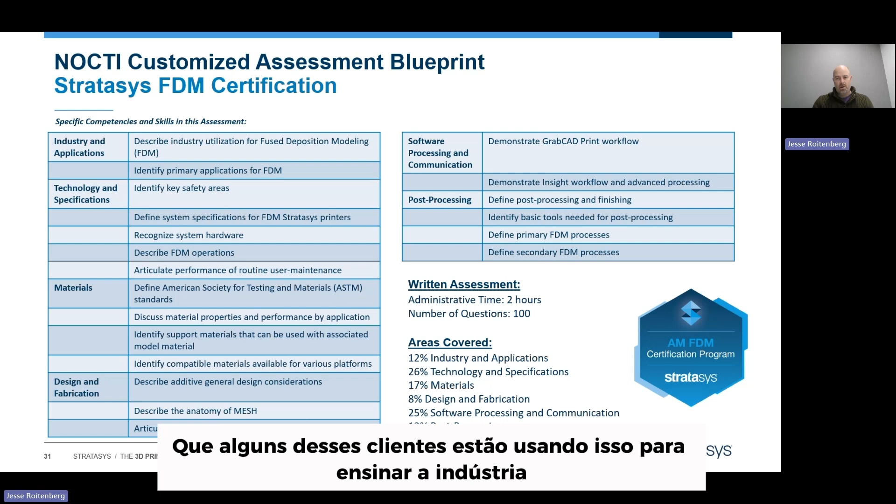It's about 30 to 40 contact hours when you do teach it. So people are turning it into courses, but they're also doing independent study. I mentioned at the beginning that some of these customers are using this to teach industry and making money. So they're bringing money back into the institution because they're teaching their industry partners or local industry. It's a great way to build that up. And that's a great way to have these students actually engage with industry for potential careers.

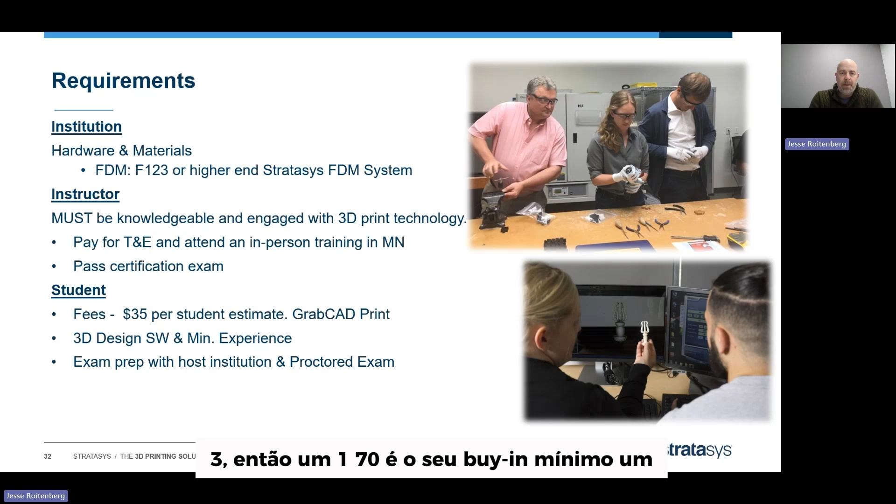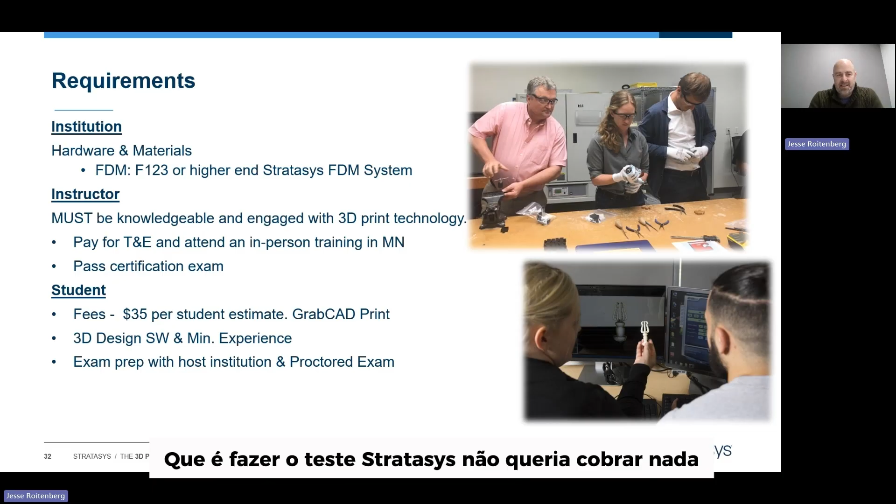Requirements on this is you do have to have an F123, so a 170 is your minimum buy-in. If you have a 450, that's more than enough. The cost is $35 per student. That's to take the test. Stratasys didn't want to charge a thing, but through NOCTI, it's a must because it pays for the administration piece of it. But it's a very low cost.

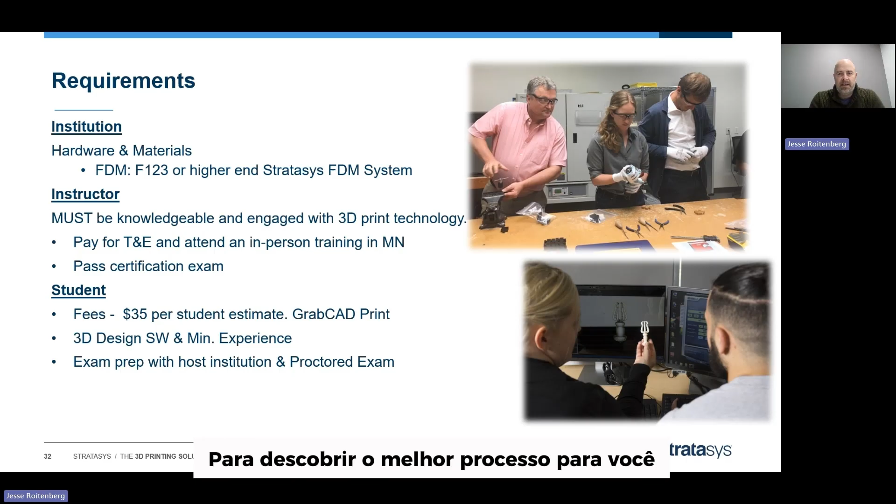To go through the training, there's no cost. You just have to get to a site that Stratasys is offering. If it's at Stratasys, we do have partners offering the certification course. Sometimes they'll charge for it, but sometimes they'll roll it into the purchase of a printer. You'll have to talk to your local group to find out the best process for you.

Some nice quotes from some of our people that have gone through our training. You can read them, but one of my favorites is, certification creates a way to quickly articulate or communicate the level of knowledge to others, regardless of their own personal know or expertise in that area. So basically saying if you've passed this test, this is on your resume, you have shown that you can communicate this level of knowledge, which we love.

All right, final topic. This is our cost of ownership answer. This is where we feel we're addressing cost of ownership and doing something very aggressive for education, because at the end of the day, we want students printing, not worrying about paying for what is printed. We want a lab to have that flexibility and that ability to be like, yes, let's try it, let's print it, let's fail, let's try it again. So we put together these educational bundles.

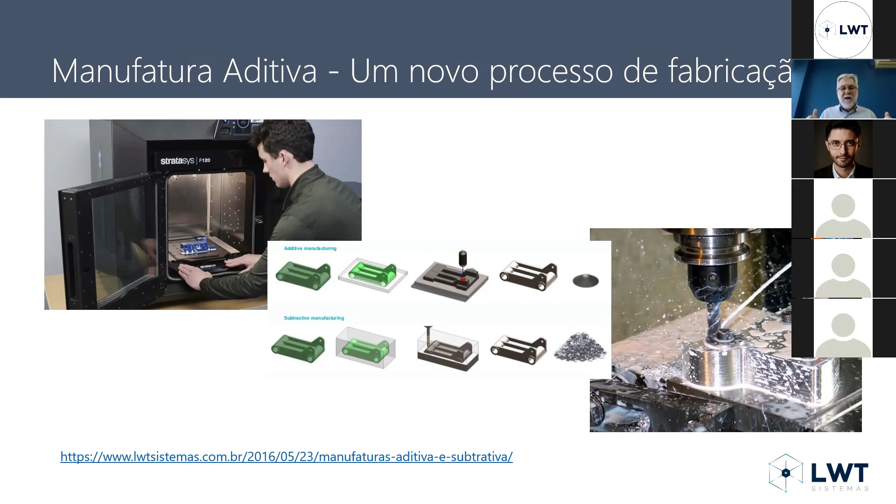É exatamente igual quando você passa pela universidade ou pelo colégio técnico, na parte de ensino você aprende o torneamento, o fresamento, a solda, a injeção plástica e a manufatura aditiva. Lá tem coisas boas, coisas ruins, limitações, processos, pós-processos, o que é possível, o que não é possível, materiais. Então essa é a forma de transformar a manufatura aditiva em protagonista dentro das instituições de ensino, é onde a gente tenta trabalhar, apoiar e ajudar vocês.

Lembrando, a manufatura aditiva é um canivete suíço, uma ferramenta com uma aplicabilidade muito grande. Vocês viram algumas aplicações na área de ensino, acadêmica e de pesquisa, mas existem muitas outras. Por exemplo, hoje existe a possibilidade de imprimir peças implantáveis, planejamento cirúrgico, e também se falou bastante da parte de capacitação de profissionais, não só na linha básica, mas na avançada.

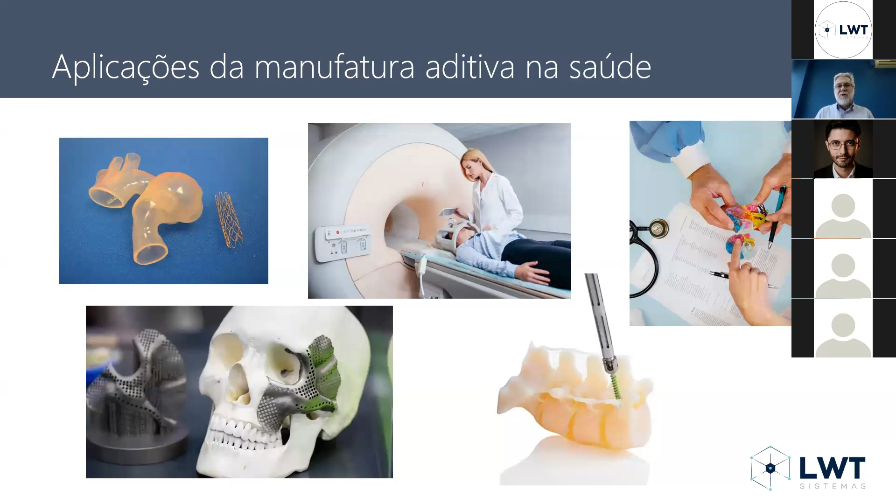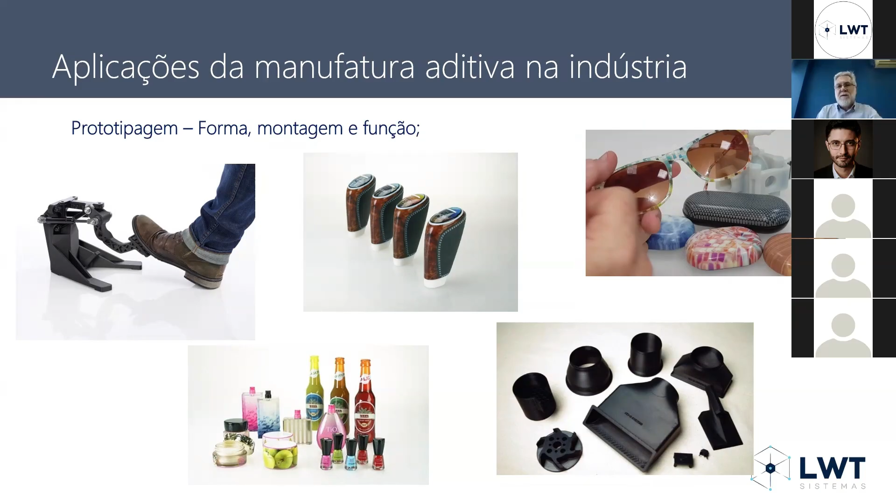A gente vem acompanhando isso na área de saúde e na indústria, na parte de prototipagem, não só a básica, mas principalmente a prototipagem funcional, protótipos especiais, protótipos complexos. Isso vem sendo usado cada vez mais na indústria, e os profissionais muitas vezes não estão capacitados ou não têm o expertise como deveriam.

Apoio à manufatura, e existem dezenas de outras aplicações. Principalmente o que vem crescendo muito, e eu diria que seria o grande divisor de águas, é a parte de impressão 3D polimérica e metálica para pequenos lotes, em substituição aos processos convencionais.

Hoje você precisa de 100 peças injetadas, por exemplo. Poxa, vamos fazer ferramenta, vamos fazer todo o processo? Não, vamos imprimir ela diretamente. Hoje já existe tecnologia, tanto de impressão quanto de materiais metálicos e poliméricos, que já permite esse tipo de atuação.

Será que o aluno está preparado para isso? Será que a indústria está preparada para isso? São os pontos que eu acabo perguntando, porque a Stratasys cada vez mais está com foco em manufatura e protótipos especiais.

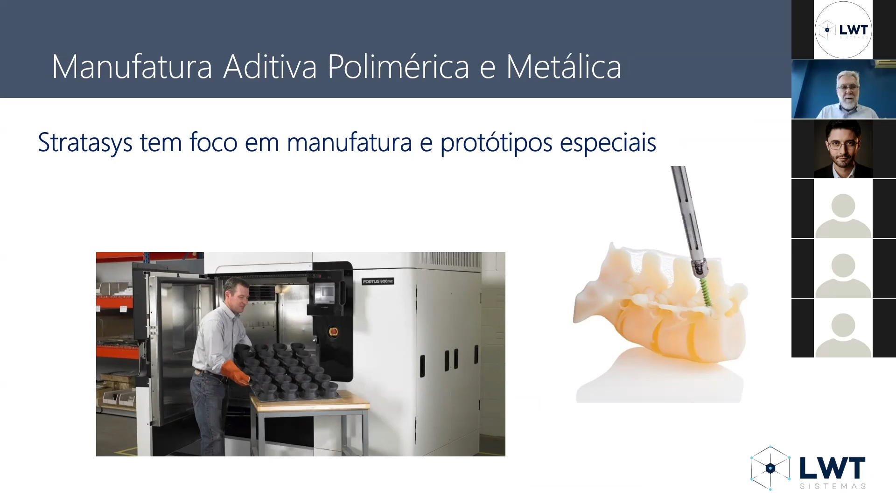Tudo que é fora do padrão, como eu disse, um biomodelo extremamente complexo, um protótipo de embalagem, um protótipo especial, e peças que normalmente podem ser usinadas e que têm alta demanda e aplicação, tanto de materiais quanto estrutural, é onde a Stratasys se encaixa muito bem.

E aí é onde a gente pode apoiar e ajudar vocês. Só para falar de alguns clientes que a LWT possui com impressoras Stratasys: o Insper é um grande parceiro nosso, e com a Unesp a gente está fazendo um trabalho muito legal, com um laboratório para simulação cirúrgica e ambiente virtual.

É interessante também o próprio pessoal da PUC e da Federal do Espírito Santo, que falaram um pouco aqui. Então, alguns dos nossos clientes nesse segmento, interessante.